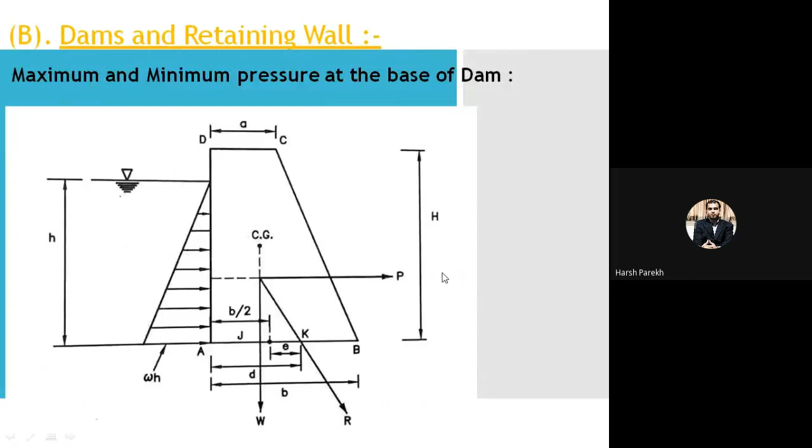It is already a formula. Okay, so you can note down this. This is a required thing. You should note down this. And make sure this is a square and here it will be b square. This is b square, huh? Not only b, it will be b square.

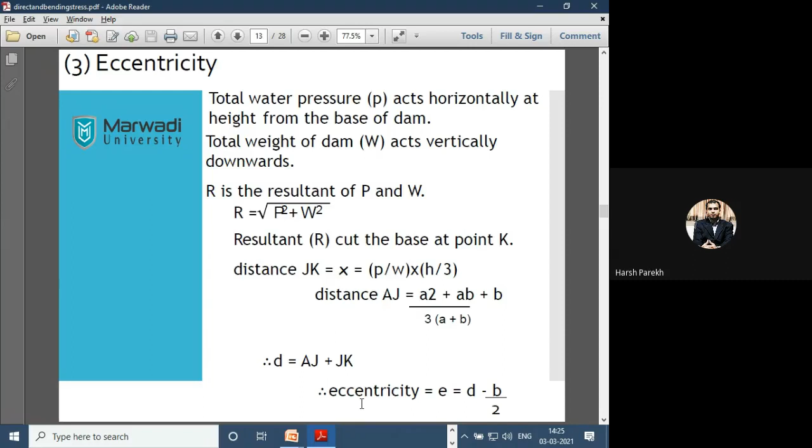Okay, once you complete this, then our next step is about the maximum and minimum pressure. So if you want to find out the maximum and minimum pressure acting on a dam, this will be the formula: p max is equal to W upon B into bracket 1 plus 6e upon B. When it comes to minimum, plus will become minus. So this is the formula for finding out the maximum and minimum net upward uplift pressure.

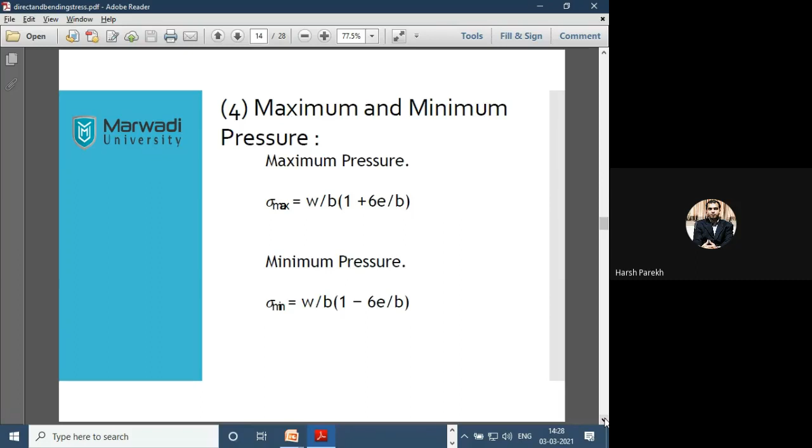Now when it comes to a retaining wall, what is the difference between a retaining wall and a dam? Can you tell me what is the difference between a retaining wall and a dam? Yes, Manan, please tell me.

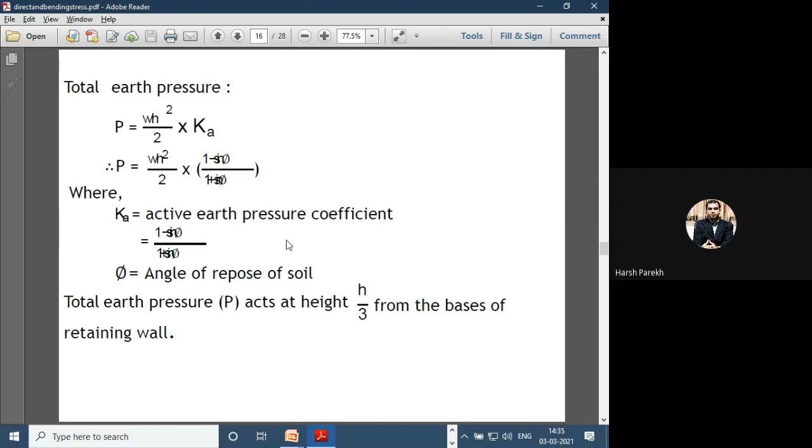Manan? Okay, then we can move on.

Right. Now this comes to the stability of a retaining structure or stability of a dam. A retaining wall or dam is checked for the following stability. First is no overturning. You should go with some stability check for your dam. Is it stable or not?

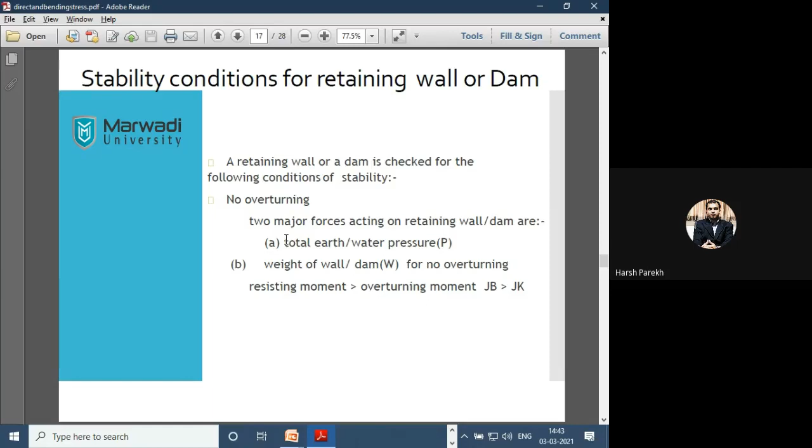Okay, now next is no tension at base. To avoid tension at the base of a masonry dam, the minimum stress should not be negative. So if you find the minimum stress there, the value shouldn't be negative. For no tension at the base, eccentricity should be less than b by 6. The value of your eccentricity should be less than b by 6.

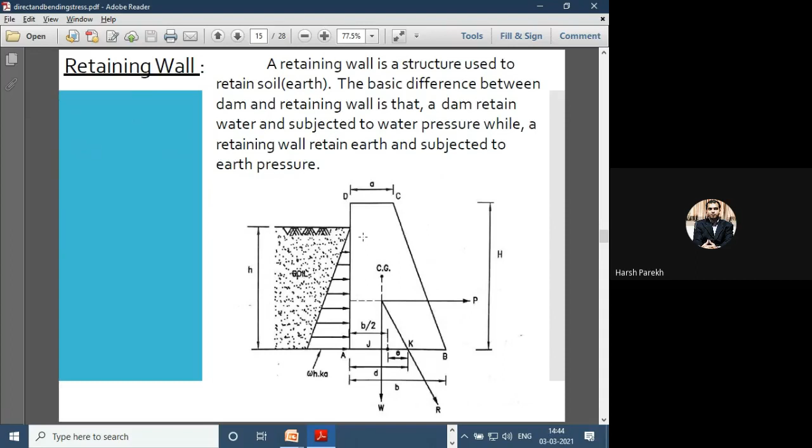That means what is the value of eccentricity? See, this is your eccentricity, right? Your e here is the eccentricity; it shouldn't be greater than b by 6. Now where is b? This is b, right? This should not be greater than b by 6. This is b, okay? Otherwise it will be under tension. If it is greater, it will be under tension. So note down this.

Then we will go with no sliding and then no crushing. Then we need to do that. I think this week we will complete the dam retaining structure, and then we have two more chapters to complete. Oh. We are running too fast, right? Wait.

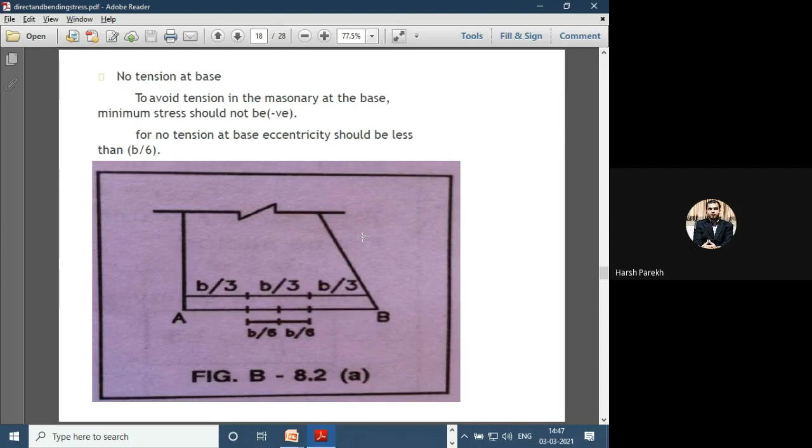Okay, then we have no sliding. The next topic is no sliding. So for the no sliding condition, what happens?